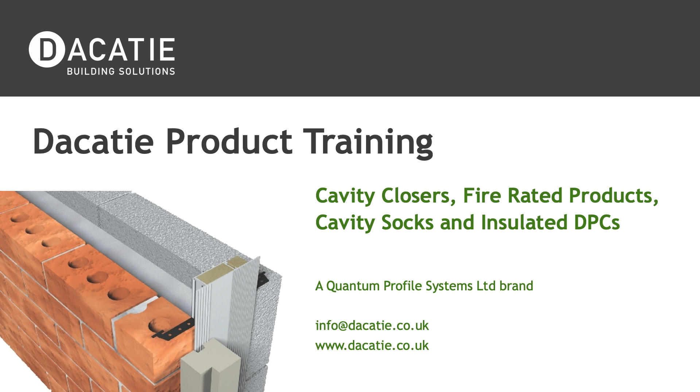Dacatie is a brand under the Quantum Profile Systems umbrella. Quantum Profile Systems is a manufacturer of products of Quantum Flooring Accessories: Dacatie, Q-Wood and Q-Lean. Now, looking at our own brands, Quantum Flooring Accessories, we make a set of flooring accessories which is sold into the contract flooring industry, i.e. stair nosings, entrance matting, cap, cove, skirting and transitions.

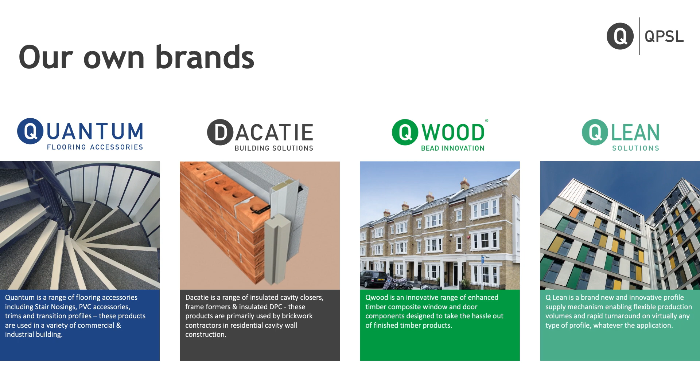Dacatie Building Solutions, we're a manufacturer of leading cavity closers in the industry, fire socks, frame formers and insulated DPCs. Q-Wood is a composite timber alternative that we sell into the timber window and door market, and Q-Lean Solutions is the ability to make any product for a customer out of PVC.

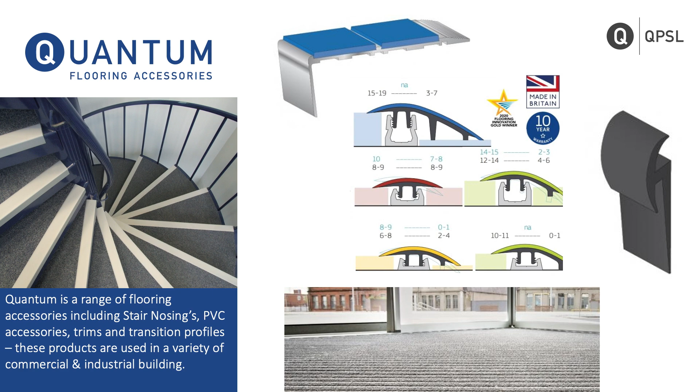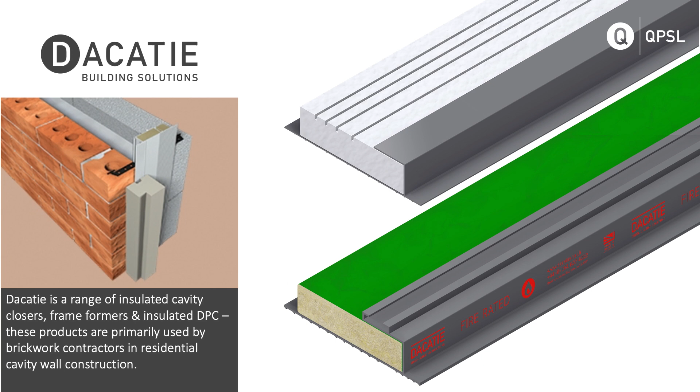So if we quickly look at the other brands we do, Quantum Flooring Accessories, you can see a few examples: stair nosings, which is very popular, a lot of different transitions, entrance matting, capping and co-former. Q-Wood, these are all the component parts that make up a timber window or door, but made from a composite material. And of course, Dacatie, cavity closers, insulated DPCs, fire barriers.

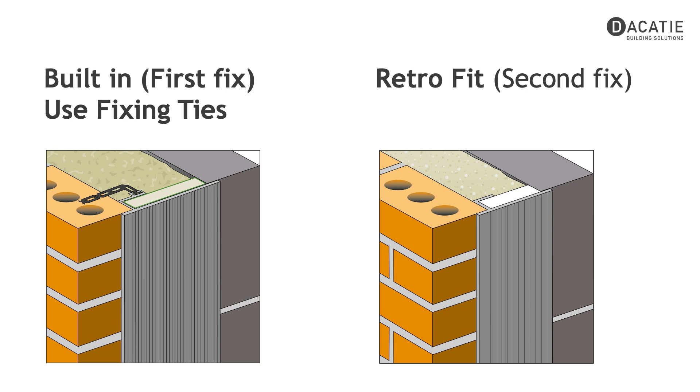So if we look at a cavity closer, when these are fitted, there's two traditional methods. We have first fix and we have second fix. First fix is where you use ties in the brick and the block to secure the closer. Second fix is simply friction fitted. All our closers are BBA approved. They're all compliant with Part L building regs. We have check reveal options for the severe weather option, and 0 GWP and 0 ODP insulation.

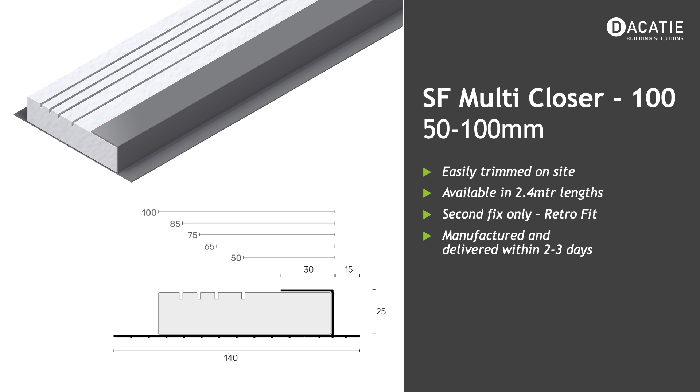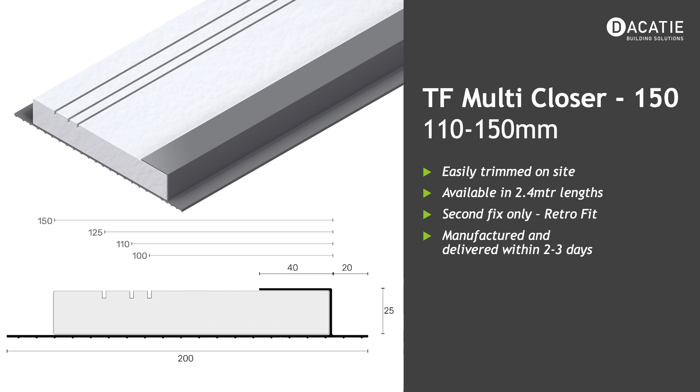So the first product we're going to look at is the multi-closer. Multi-closers, we have two of, SF Multi and TF Multi. The SF Multi suits cavities between 50 and 100 mil. Now, the multi-closer is very easily trimmed on site by the contractor. It's available as 2.4 metre lengths. This is a second fix only product. It's manufactured and delivered onto site or into branch within 2 to 3 days. And TF Multi, like the SF Multi, is a 2.4 metre length, trimmed on site, and this one suits a size of 110 to 150 mil.

Superfix size closer, so away from the multi-closer, we manufacture to exact sizes. So for instance, if it's a 75 mil cavity, SF 75, and that will suit the cavity. These can all be made as 5 mil increments, available in 2.1 or 3 metre lengths. They are second fix only, so friction fitted, and 2 to 3 days we can deliver to site or into branch.

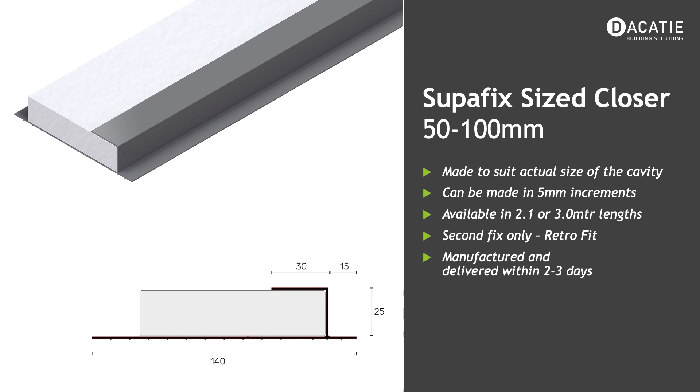Supafix Flexicloser, very similar to the multi-closer, apart from the fact you don't need to trim anything to install it. It's almost like a sponge material, so ideal for random stone or variation in the cavity. Available as 2.4 metre lengths, second fix only, 2 to 3 days, again delivered onto site or into branch.

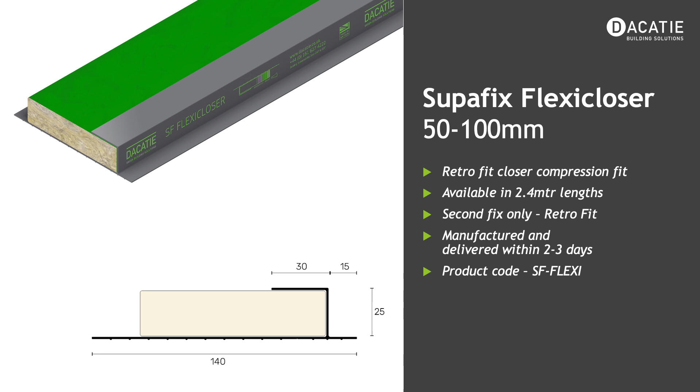The TF1000 cavity closer, this closer suits cavities between 50 and 100 mil. Again, made in 5 mil increments, and they are available as 2.1 or 3 metre lengths. Now, this product is a first and second fix option, so it can be tied into the wall, and this is typically 2 to 3 days delivered to site or into branch. TF2000 sized closer. Now, this one supports any cavity between 110 and 160 mil, 5 mil increments again, 2.1 or 3 metre lengths available. And like the TF1000, it's a first and second fix option.

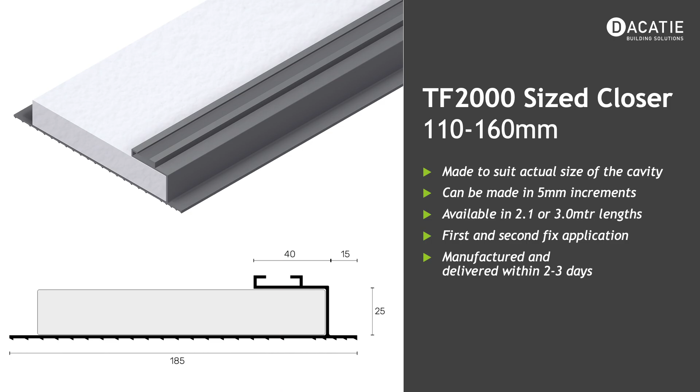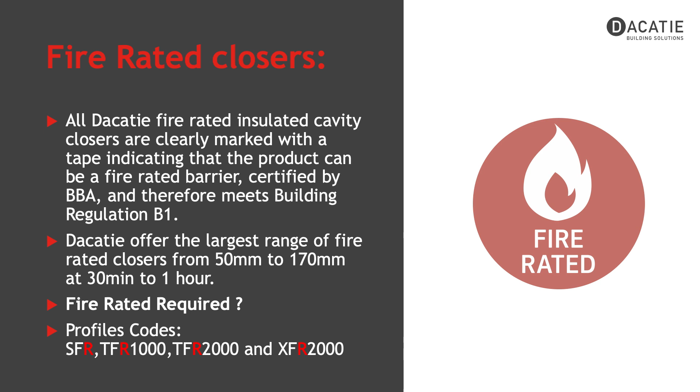Now, away from our standard non-fire rated closers, we have one of the largest range of fire closers in the industry. All Dacatie fire rated insulated closers are clearly marked with a tape of that product and that can be a fire barrier. It's certified by the BBA and therefore meets the building regulations Part B1. Dacatie offer the largest range of fire rated closers from 50 mil to 170 mil and from 30 minutes to 1 hour. A question that should always be asked when anyone's asking for cavity closers: does it need to be fire rated? And as we look at our products available under the fire rated banner.

SF fire rated. Now this product suits cavities between 50 and 100 mil. It's a 60-minute fire integrity rating. Similar to the non-fire rated closers, they can be made in 5 mil increments. Now all fire rated products come as a 2.4 metre length as standard. And the SF fire rated closer is a second fix only. 2 to 3 days delivered to site or into branch.

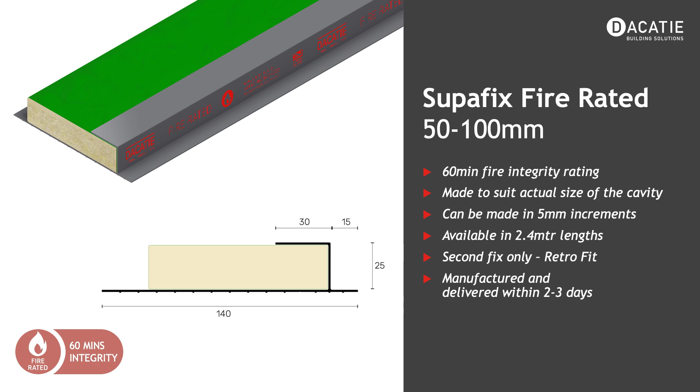TFR 1000 fire rated closer. It's again 50 to 100 mil suitability. 60-minute fire rated integrity, made to suit the actual size of the cavity, 2 to 3 days, delivered to site or into branch.

TFR 2000, it suits the bigger cavity, which is 110 to 160 mil. It's a 30-minute fire integrity rating, 5 mil increments on the sizes, 2.4 metre lengths, and this has the option of being fitted either first or second fix.

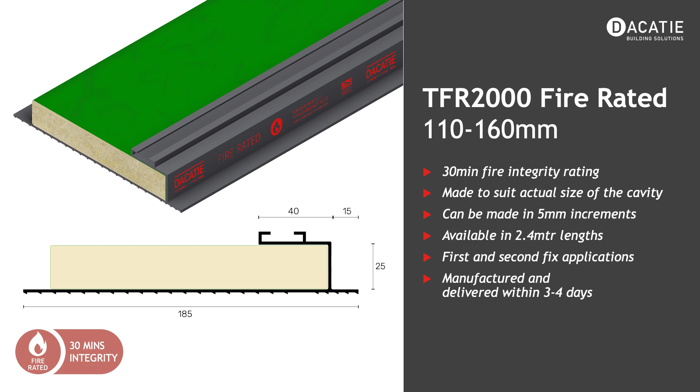And the final cavity closer we do is the XFR 2000. Now this is a 60-minute fire integrity rating. It's 5 mil increments between each size. It suits cavities between 100 mil and 170 mil, and it's a second fix only. This one is a 5 to 7 working day delivered to site or into branch.

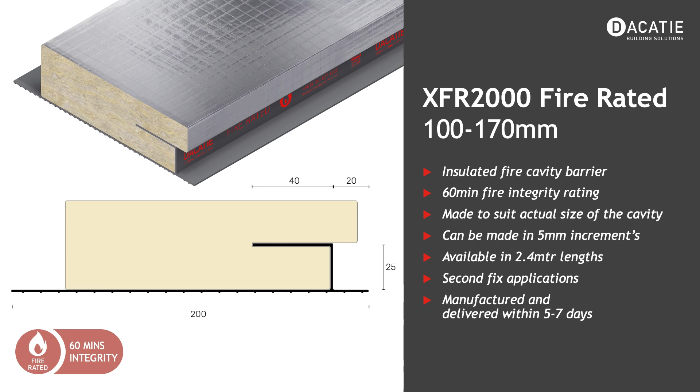So when we're looking at the second fix and how we are fixing them in with the ties, the code for these ties is DTU. They're suitable for the TF1000, the TF2000, and also suitable for all frame former profiles. Supplied in bags of 100, specifically designed for the house builders, and the way you would use these is you stagger them from brick to block, roughly 225 mil each side.

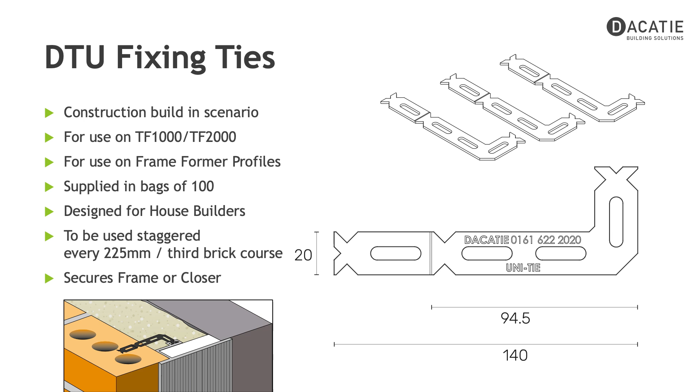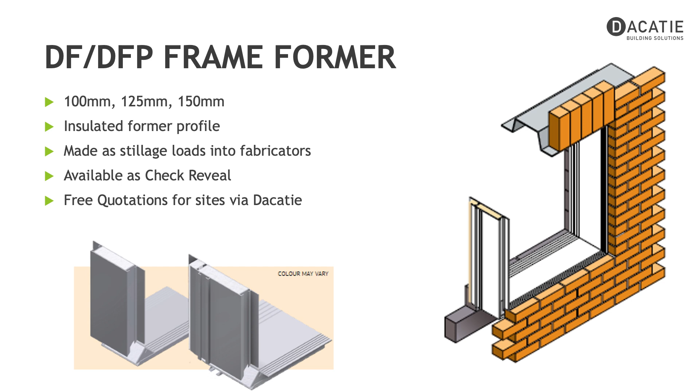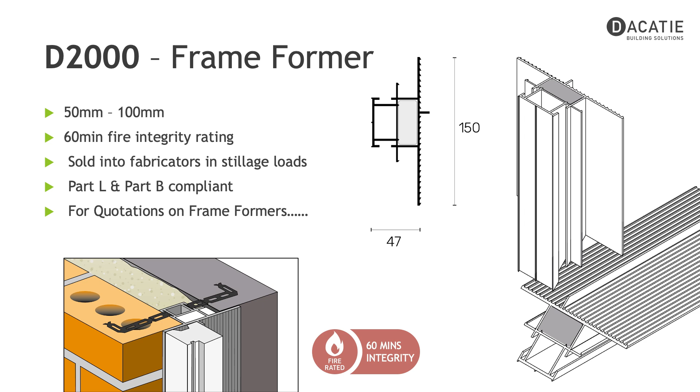Another frame former profile we do is the D2000. Now this product suits cavities between 50 and 100 mil. It's a 60-minute fire integrity rating. Similar to the DF, it is sold in stillage loads into fabricators, and this one complies with building regulations Part L and Part B.

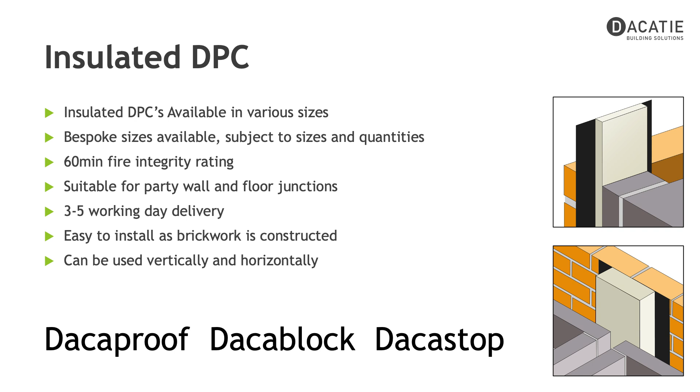We have a range of insulated DPCs available, various sizes, bespoke sizes available. They are 60-minute fire integrity rating, suitable for party walls and floor junctions. All insulated DPCs are typically 3 to 5 working days delivery onto site or into branch. It's an easy to install product as the brickwork is constructed, and they can all be used vertically and horizontally.

Now away from our products, Quantum or Dacatie has a project sharing scheme where we target architects, specifiers and quantity surveyors all across the UK, work with them on particular projects, get our products specified and point the contractors in the direction of the distributor nearby.

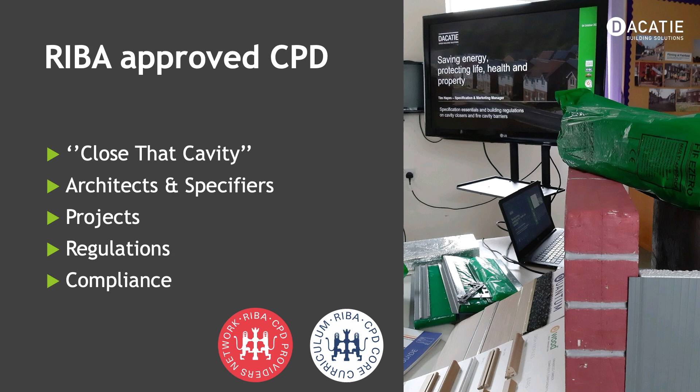As far as the merchant is concerned, Dacatie can offer trade days and open day events, buying group events, any merchant training directly face-to-face with the trade counter guys or the sales guys, merchant point of sale for the trade counter, and general support. And if in doubt, you ask the question.

Advice is always available. Data sheets are on the website. BBA certificates are also on the website. We can also visit site if need be. Dacatie app is available. And we have a fantastic customer service team at Quantum. So Dacatie Building Solutions is your one-stop shop for cavity closers.